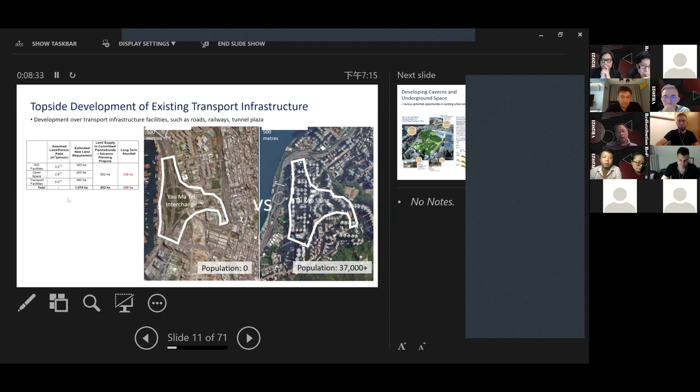Another opportunity we haven't explored is underground space. There's a lot of opportunity in Victoria Park and Kowloon Park, and also Quarry Bay, Causeway Bay, etc.

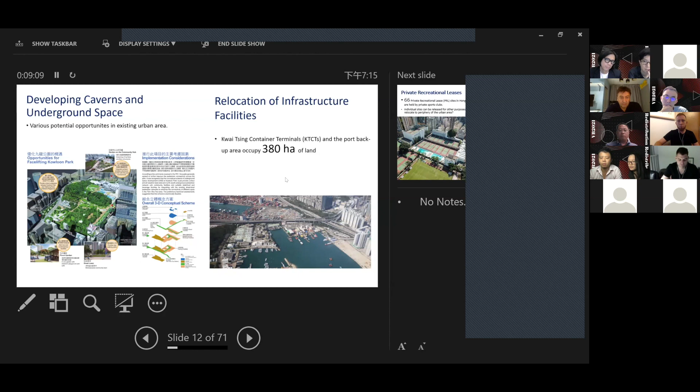And also those infrastructure occupying a lot of land, like the Kwai Chung terminal, container terminal. Because of history, they are there, but they are occupying a precious piece of land. Should they be relocated to somewhere else? That is also something we can discuss and see whether there's a better way of dealing with that.

And there's also GIC facilities, recreation facilities - we have a lot of those private recreation clubs in every part of Hong Kong. But in fact, should all these facilities be better located in better locations? For example, in the periphery of the city, maybe the edge of the country park or the greenbelt area, and just vacate the land for other more meaningful use. So this is something we could all consider.

And also GIC facilities now is a very old-fashioned way of planning. Government allocates lands to different functions, for example LCSD use, police use, fire service use, etc. But could that be better coordinated into multi-purpose GIC facilities? This could release a big number of very valuable sites in town.

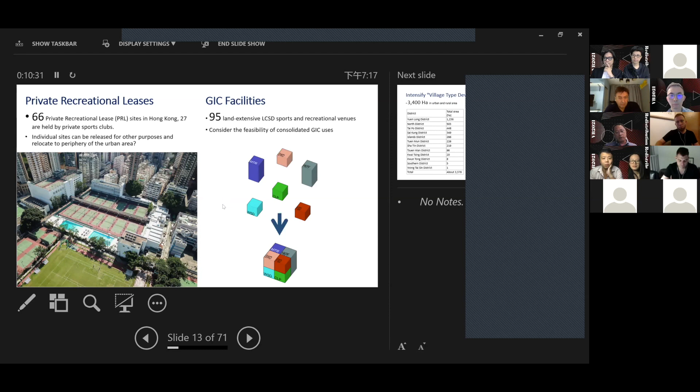The last one, but this is also a very huge figure - you may notice a lot of those village houses. In fact, it's not just in the rural area, it's right in the middle of town. You can see some actually located in Hung Hom, Wong Tai Sin, and the photos shown here are of Tai Po market, Tai Po station - it's right next to the MTR station. There's a huge stretch of village houses.

So currently the density is a 3-story building. If we can intensify that into 6 stories, for example, we can almost release over 1,000 hectares for other purpose. So all these are facts about whether we are really using our land resource in a clever, creative way.

So I'll just stop here and let the exhibitor go through the exhibit with us.

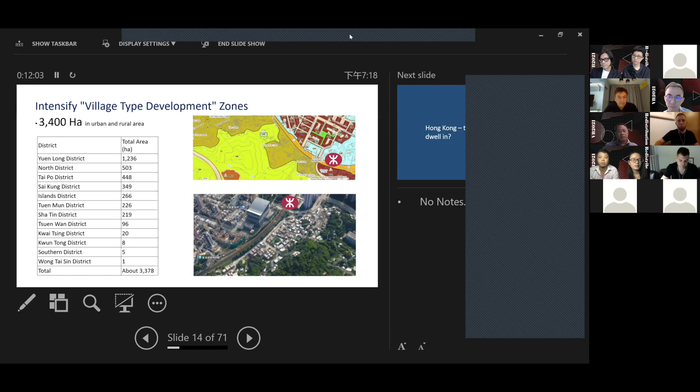Peter, hi, you're muted.

Yes, hi Peter, can you tell us more about your group's exhibit and its response to the main theme of redistribution? Yes.

Can you see the Hong Kong Squared spatial visions? Yes, we can. Okay, alright.

First of all, myself, Gerhard, and Daneil, we all trained as architects, and Gerhard, for instance, did his postgraduate PhD in urbanism. I am also an architect and urbanist. We teach in the School of Design in PolyU, and as part of our research, but also part of our teaching program, we teach graduate students, master's students in design, or specifically in urban environmental design.

Myself and Gerhard have been running a program for a number of years, looking at a sort of speculative vision of Hong Kong - not just Hong Kong, but also future urbanism or urban issues within the Greater Bay Area. At the moment we have stage 2 of this project going on, connected with TU Delft in the Netherlands, looking at the wider issues of future development in the Greater Bay Area. So refer you to this website if you're interested as well.

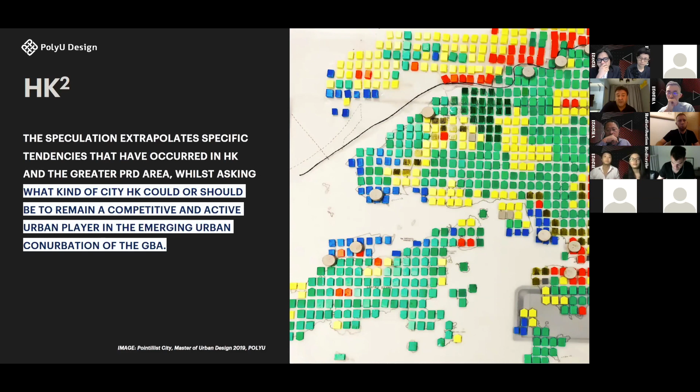These proposed scenarios focus on 3 key things. There are other aspects to this, but 3 general possibilities and 5 different morphological approaches. So the first one here is a monocentric territory. We know that Hong Kong has, for instance, one CBD, more or less 1.5, let's say, because Kowloon Bay is developing into what they call CBD2.

But we also know that in many cases, given the size of Shenzhen across the border now, the center of gravity of a lot of those things, depending on the sector or the industry, may be pulled closer towards the border or towards new infrastructures such as the Macau Bridge Airport cluster as well.

But there are other opportunities within this that mean we can actually investigate what those things are. We can speculate on future issues, much as you can see the government is doing, whether it's misguided or not, with proposed new islands just off Lantau.

Part B is polycentric node. In other words, that Hong Kong or its subcenters exist as a series of different nodes within the Greater Bay Area, allowing for specific expertise or specialization to happen within the wider urban agglomeration. The Greater Bay Area would in fact be a kind of urban agglomeration of well over 60 million people, with some estimates up to about 90 or 100 million.

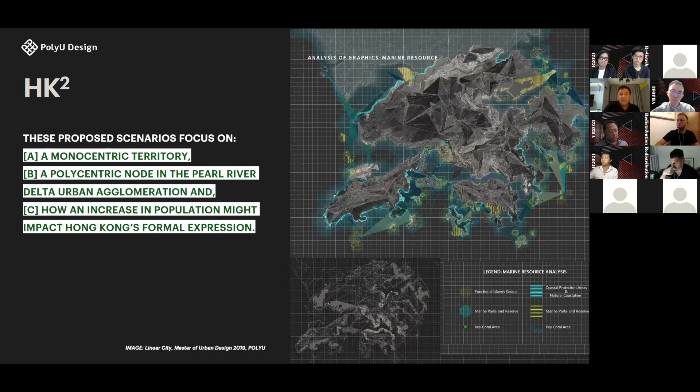The production of such approaches, we think, is highly relevant to spatial planning, but in some ways our particular point of view is that certain models of spatial planning, which tend to focus on the centralized city and its peripheries and edges, need to be questioned again: how and in what ways we begin to plan for new forms of city, for instance very, very large urban conditions, cross-border issues, and so on.

In the same way that perhaps Europe, once it looked at European Union integration, cities started to have to plan for cross-border things involving urban development that spans between two countries. This involves for us the opportunity to develop scenarios, to play out these opportunities, and then to look at these things on a series of very different scales.

We also asked our students, as part of their research, to project certain kinds of fantasies in the same way that MVRDV did, to imagine very speculative propositions or gameboarding processes, in other words, so that they can play out different scenarios without feeling constrained by existing urban methodologies.

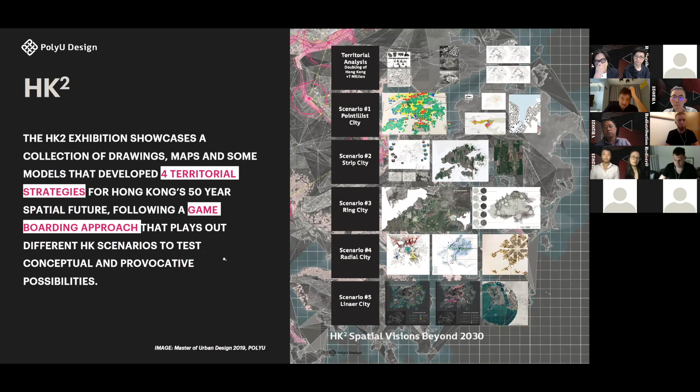So each of these then, based on the research, developed these 5 different scenarios. If you're interested, we're happy to provide more information—this is just a teaser. One of these that we selected for exhibition was this one called the Pointillist City, and we just chose a little part of this.

A tiny bit about this scenario: we eventually chose it based on increasing education and expertise in Hong Kong, with the development of things like UST, higher level research, the service economy and so forth, to activate some kind of specialization that can provide a competitive advantage for Hong Kong in relation to various cities across the border in mainland China that are more based on production.

So this would mean Hong Kong's vision would be a much more intensively research and university-oriented, industry-led research city approach. And then these little colored blocks would allow a certain kind of development to happen in this way.

Without explaining more, this approach simply chose a part of this as the base for our combined model exhibition, like a ground for some of the ideas that the other two groups developed.

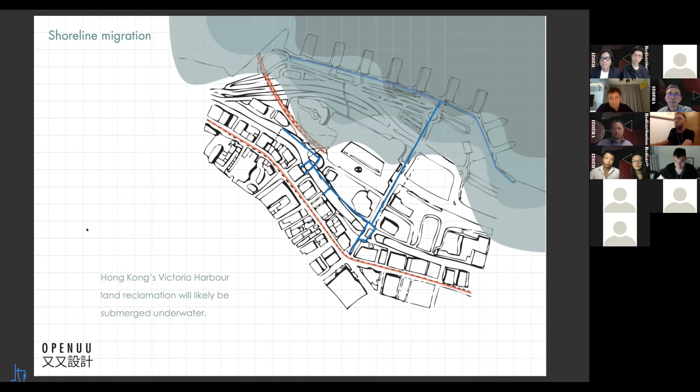...because Central actually has a lot of built-up areas over the years, and as the years move on, as you saw in the previous slide, you'll see more and more of that area covered. And as Joel already touched upon, the area that's been built up in Hong Kong is very small. The rest are all reserves or conservation areas, so not really touched. But based on what we have available, I think there are many opportunities to really increase the limited supply of land that we have in Hong Kong.

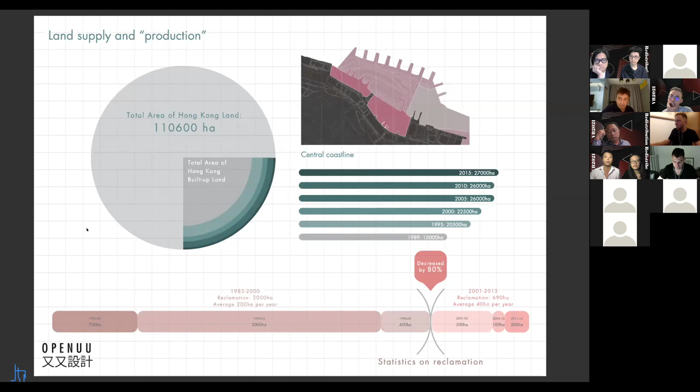As Hong Kong takes over more and more of its harbor, we are slowing down on reclamation, and we are seeing what reclamation does to the surrounding areas, especially the ecology of the harbor. Obviously it's not friendly, but it does give Hong Kong more land.

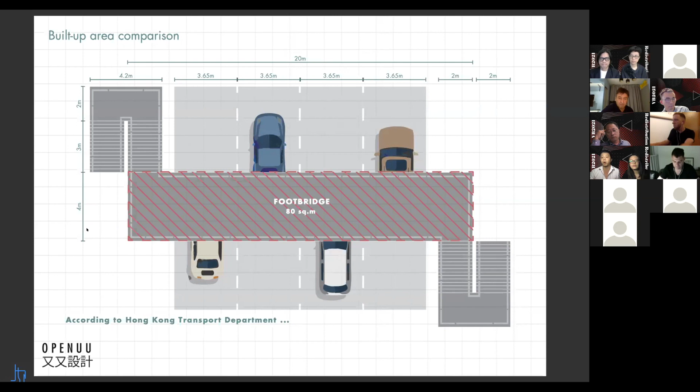So we've gone to explore, as I mentioned, we're looking at Central, and we're studying the bridge system. As a comparison, a typical bridge in Hong Kong is about 80 square meters in area - it takes up not even 4 parking spots compared to a parking lot. Hong Kong has a lot of these elevated walkway systems that we've looked at, and because we are in Central, we've chosen the Central elevated bridge walkway system to look into, though this can be applied to all the different districts where there are elevated walkways.

This is slightly inspired from Venice, seeing the Rialto Bridge - it's a bridge that's actually occupied, not just for connecting two points, but it has a program within the bridge itself. So to go a little more into what we plan for the programs...

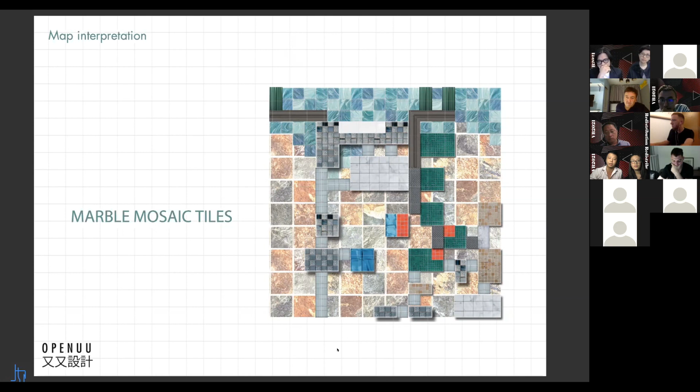To break it down, we explored in different years what buildings and bridges were built. Hong Kong really developed throughout these years, with the bulk of development in the 90s, then slowing down again in the 2000s because of the amount of land already built up.

Since this is a study of Hong Kong, we explored this further—the representation uses the colors of our money in Hong Kong, with 10s, 20s, 50s, 100s, and 1,000 represented. This plays along with Hong Kong being an expensive city, so we wanted to tie the expensive living to the color of our bills.

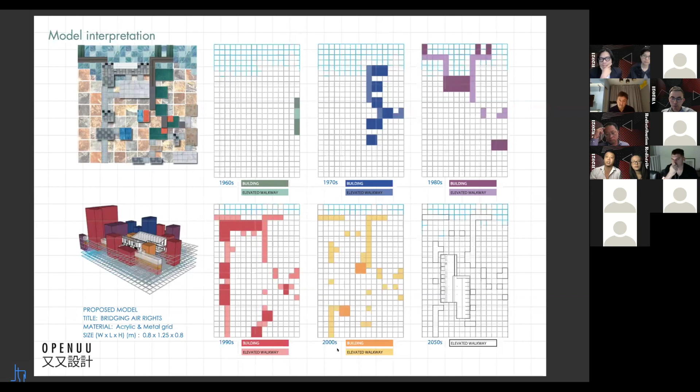There's a lot of inspiration from the Rialto Bridge, but also from Montreal, Canada. If anyone's been there, it's a cold city half the year, so there are bridging systems and underground walkways that are all programmed to fill up the city. It's not just a connection from point A to point B to stay out of the cold—there are other programs you could interact with as you walk through. We took that idea and wanted to implement it in some existing bridges in Hong Kong, or even new bridges built in the future.

Especially in Central, walking the elevated walkway connecting IFC towards the mid-levels escalators, certain parts are really wide. On weekends, you'll see a lot of domestic helpers occupying the majority of the bridge, yet you can still walk on it—people occupying it doesn't actually block all the traffic. So we wanted to adapt what Central already has to offer with some of these wider bridges.

Why not put in programs that could alleviate some of the limited space in Hong Kong—for example, playgrounds. When we were younger, there were playgrounds in a lot of city blocks. But a playground isn't a revenue-generating piece of land, so those get taken over for small developments or combined with other land for larger development. Kids nowadays have to travel just to experience the joy of being a kid.

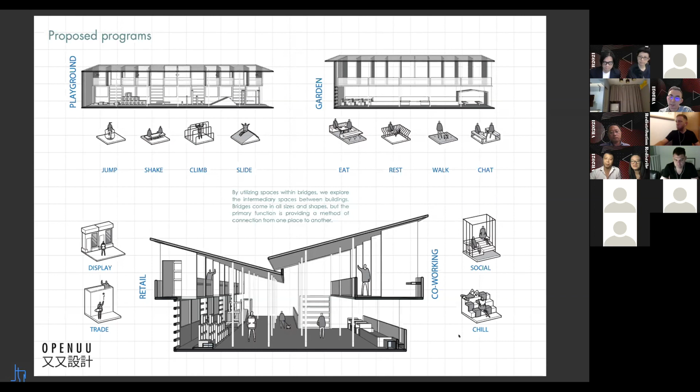Right, thank you, Kevin and Caroline. Very interesting ideas. Somehow, I think together with Peter's proposal, yours and Peter's already offering hypothetical answers, solutions to what Joe has pointed out about the redistribution of land.

And according to your exhibit's concepts, the next layer that we are going to see from VIA Architects, Frank Leung and Irene - I think the next level would be a smaller scale, right? So the scale would be going smaller on the topmost level of the exhibits.

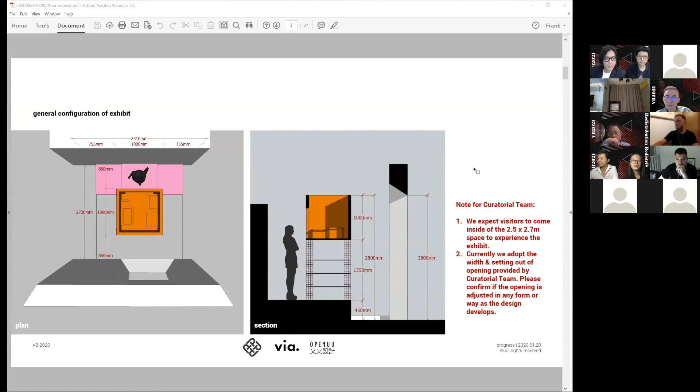Yes. Hi, are you seeing the screen? Yes. All right, so yeah, I mean, we started - it was a really great pleasure working with the PolyU team as well as Kevin and Caroline. And these are some of the shots. All right, you seeing it? You see the full screen now?

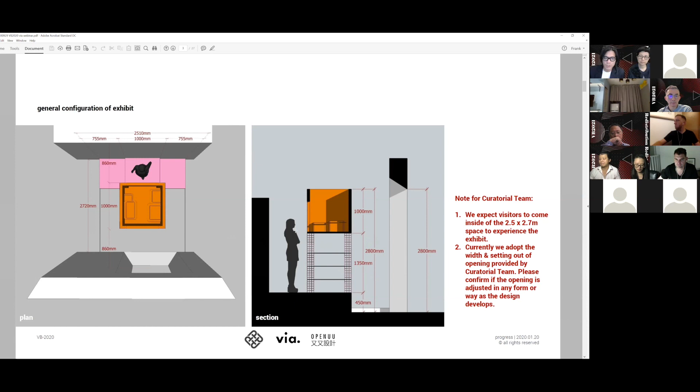Okay, yes. Okay, so here's the intention of the original exhibit. If it were to happen in Venice, it's a tower containing 3 layers, and I think PolyU's team had an urban scale, and Kevin's team chose to explore kind of a vicinity. We further zoom into a particular project, a particular plot, where visitors can actually climb a couple of steps to get an eye-level view of a project that we're actually working on in Hong Kong.

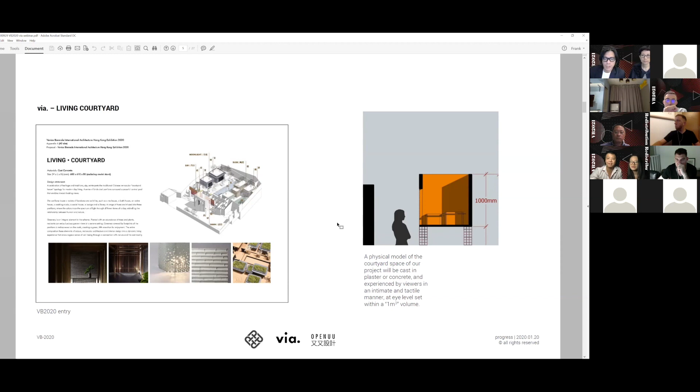So these are some shots that we submitted to the Biennale team. And the project that we're sharing is what we call Living Courtyard. We fit to the title here about redistribution. We work a lot with private residential development, and because of the prices and the pressure from the buyers, we end up dealing with units that are quite small, so the exploration here is to say, what can we do to the communal space that are shared by residents?

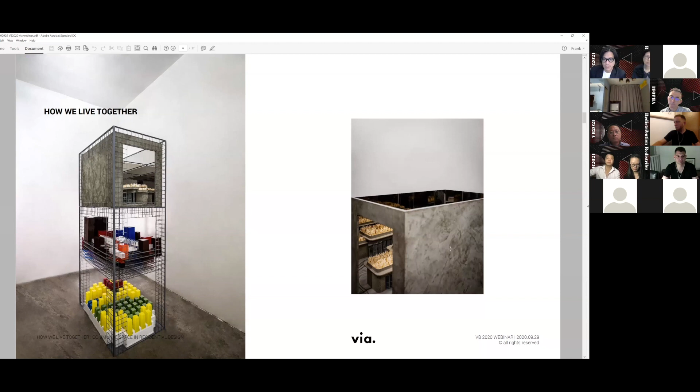And I know a lot of people will call them clubhouses, but in this particular case, you can see on the top part, this is our piece of the exhibit and a shot of it from the top. In our case, it is a courtyard space. The project is in Yuen Long, in a new territories area where there is already heritage of living in a kind of co-living way. So we really wanted to take the chance to create a communal space for residents in this project that mimics the kind of traditional way of living.

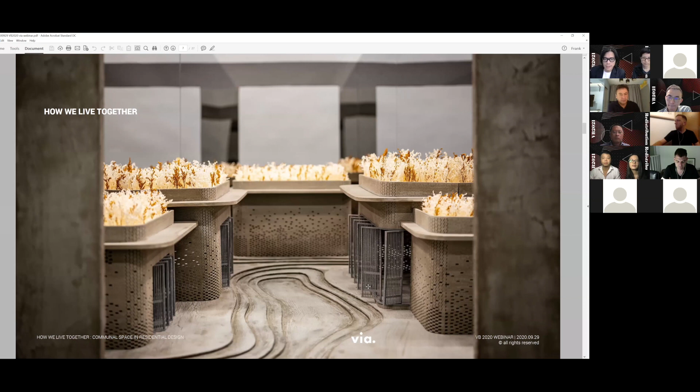So it's a number of functions surrounding a courtyard, and as you can see from the model, we'll explore a little bit more about the material interpretation. Here is a shot of the project that we're working on. Very happy to work, in fact, with AGC Architects, who are the overall architects of the project. We really handle the clubhouse portion.

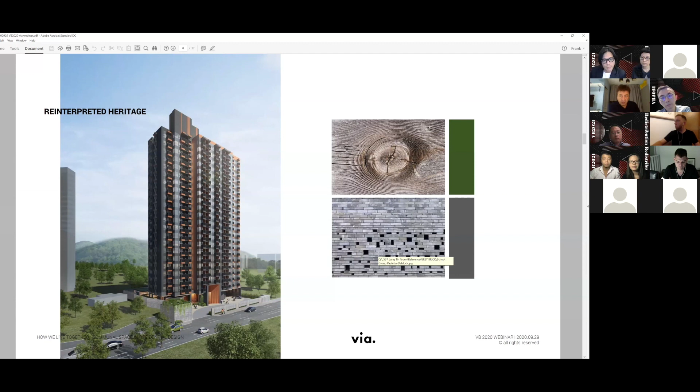Earlier on, we have already, as a team, decided to work with heritage language and materials. And when we started to look at the clubhouse, we really wanted to look back on this kind of communal living, where you have a shared space and a number of activities revolving around it - the archetypal example being the traditional courtyard house, where you have wings of different activities, a point of entry, and then you all share a common space where everybody can have kind of a breathing space as well as social activities.

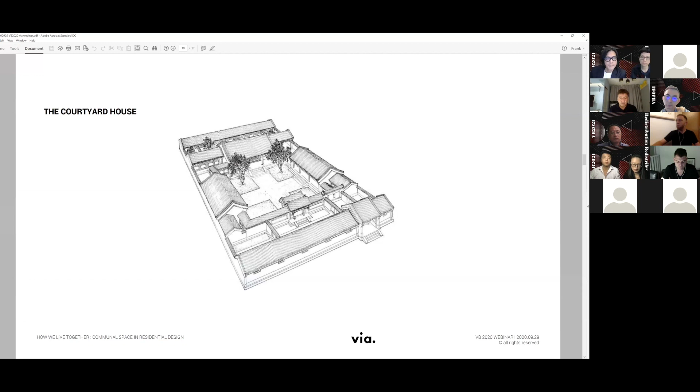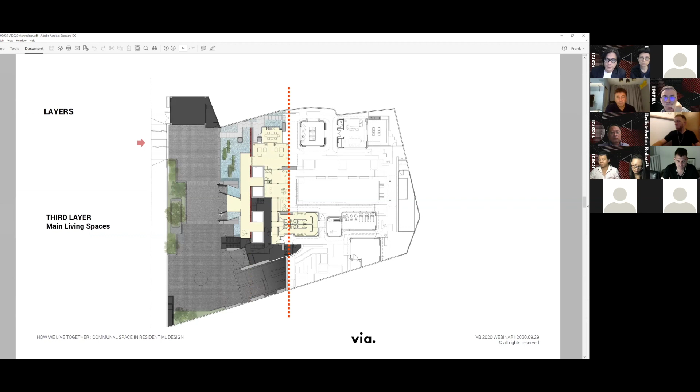We took the plan, and the project is perceived by us as a number of layers. The first layer of arrival is designed with a landscape court to arrive, traditionally called the Yingbik, the shadow wall, which is really the inner facade of the entire project. It stops everybody and redirects people to the next layer, the main living spaces of this clubhouse. But then there are other functions strung around different areas of the club surrounding a central pool.

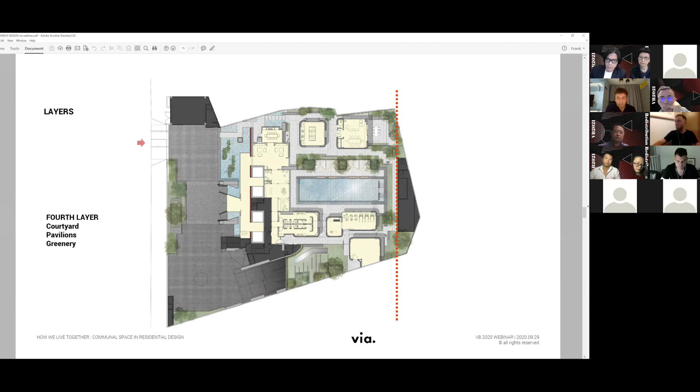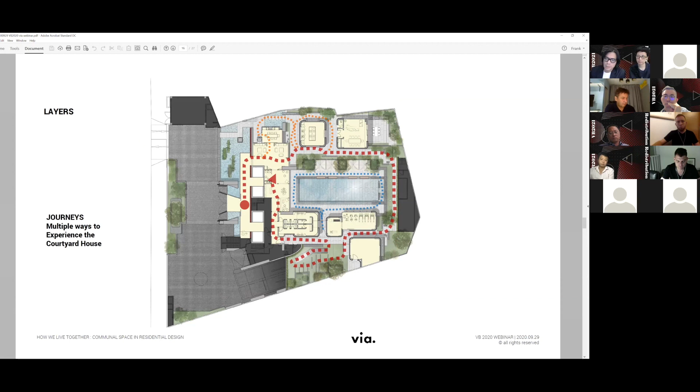This is what makes this courtyard space intimate and also a place for sharing. On the upper part, there are dining pavilions, a gym, kids facilities, landscape areas and so on that surround the entire scheme. By not having a singular interior volume, we're able to create an indoor-outdoor relationship, lots more choices in terms of experiencing the space, and a lot more choices to combine and use the spaces separately, for individuality, different age groups, and so on.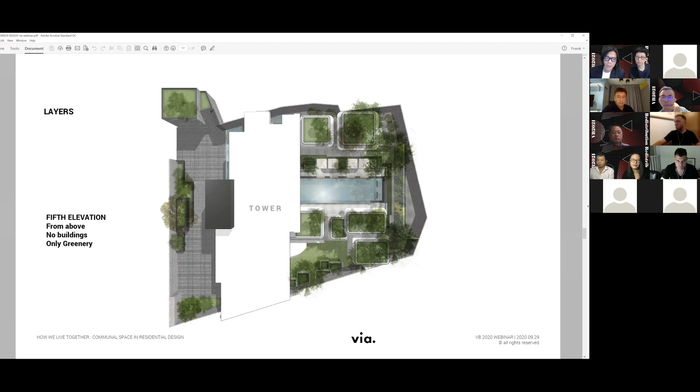The other element we have to tackle is that the entire landscape is really the base of the entire residential tower. So each of these pavilions is actually designed to be giant tree pits or flower pots. When you're looking from the tower into the courtyard, you're really seeing landscape, not buildings. That's very important to create a green, sustainable communal space for the residents.

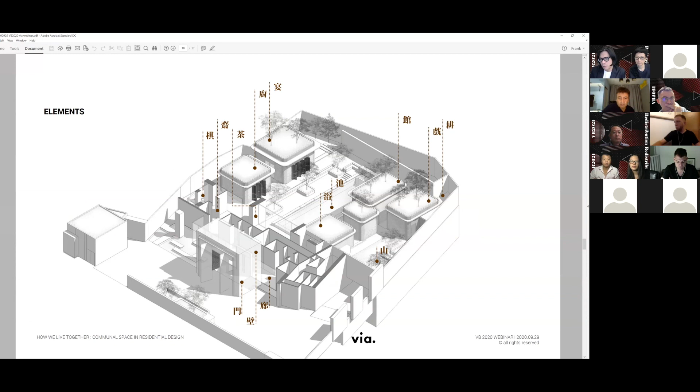Here is a diagram of the actual project and how the different elements are interpreted. Taking a nod to the heritage approach, we've given every function a Chinese word that signifies a particular function in that space. But that's really spatial arrangement, and we felt in every project we create, we really wanted it rooted to the location for the function as well as to find its soul.

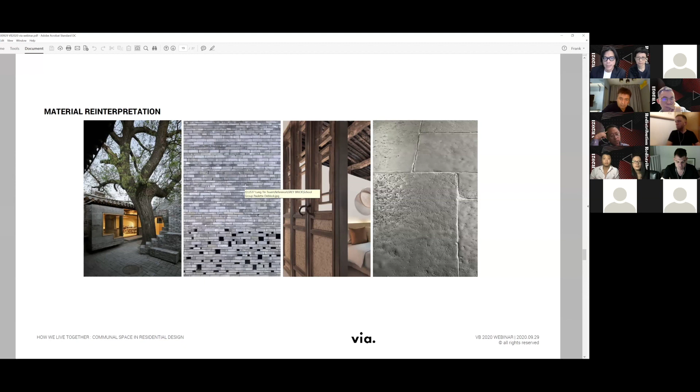And in this case, it's really the material. We explored a number of ways to actually execute these buildings, and we came up with bricks and a combination of stone and timber. But the biggest thing is brick.

The other thing we wanted to instill into the design is this idea of light. In a traditional farmer's life, light is really important throughout the day, with different qualities of light guiding you through activities. So the Chinese saying goes, you actually follow the sun. With that, we created an interior design palette that follows the colors created by different times of the day.

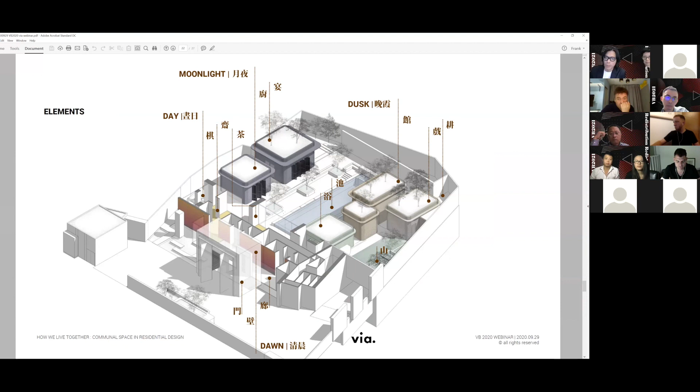I won't go into the individual spaces and renderings, because those are first-hand sales restricted material. But these are the guiding principles that guide us through different areas, and you can see an application of the different hues throughout the different functions of this scheme. So it's not just the form, but in the spirit, we're using a very traditional way of looking at the world to design this space.

Of course, brick is at the center of creating and drawing the heritage roots to this particular project. My team and the construction team spent a lot of effort studying ways of using or reusing qingzhuan, that's the Chinese brick, not only how to do it when it's flat or turning the corner, but we really wanted to do something with a certain level of porosity that actually modernizes the brick.

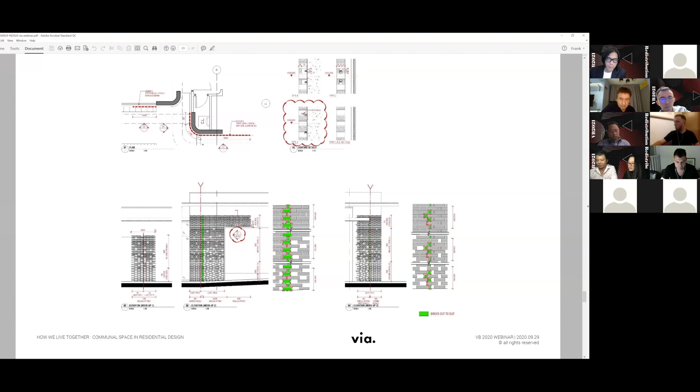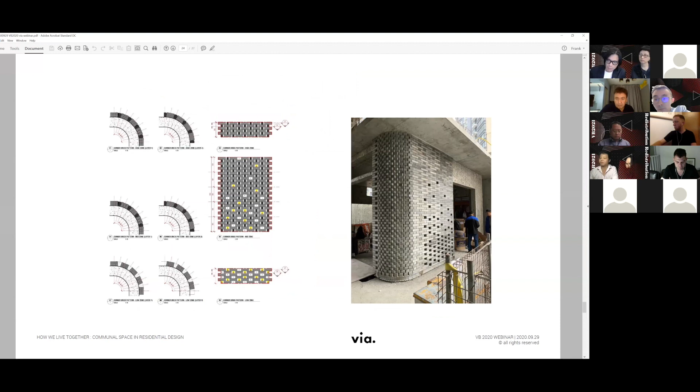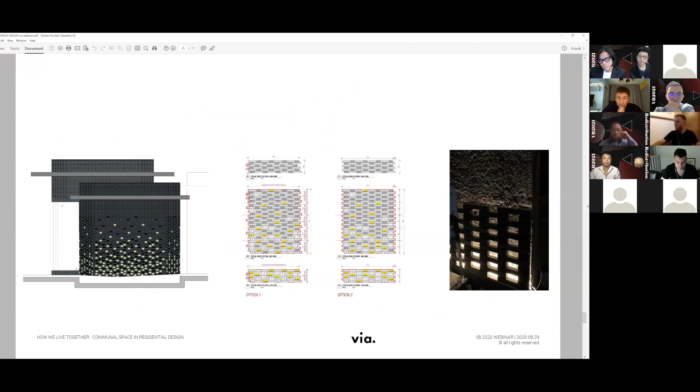So these are some of the studies and mock-ups we've done numerous times, studying how to turn a corner and make brick pieces hollowed out. This slide shows you the lighting effect we could have, the translucency, the illusion of depth, much like a Chinese screen. Working with a wonderful Japanese lighting designer on this as well, to achieve an effect that's like a glowing lantern in the evening.

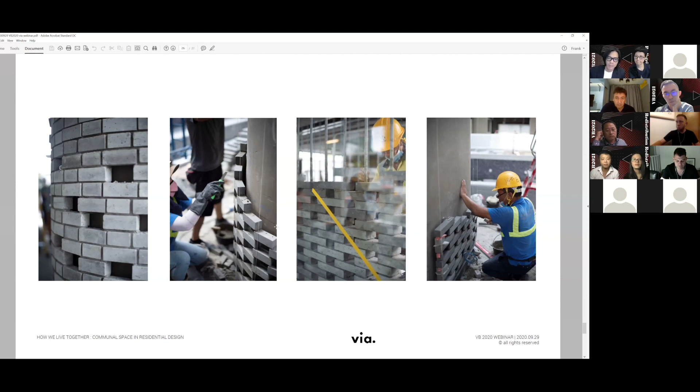This is really our last slide. I think in architecture, nothing can really happen without pairs and pairs of hands. Every time I go on site I took these pictures of the wonderful craftspeople who put these together, it's a very roll-up-your-sleeves kind of thing. As part of the exhibit, we went to a much more micro scale, from Peter and Gerhard's and Daniel's piece to Kevin's piece, and now we're zooming into a very, very intimate project. So that's really our part for tonight.

Right, thank you, Frank and Irene. This is a really nice project. Congratulations. Thank you.

I can see from a bigger scale with Peter's model to Kevin's scale in your project, you have different layers of spaces to redistribute a flat piece of land and make the spaces more efficient. But since this is a private project, this is almost the only chance we can see your project, right? Unless we buy our way in.

That actually leads to our subtopic for the second half, which Chou has more to share, whether Hong Kong is the most expensive city to dwell in. So Chou, are we going to the second part directly? Yeah, we're going to the second part. Okay, good.

Just one moment. So I have also prepared some slides about the second topic, the topic of the most expensive city to dwell in. Okay, let's see.

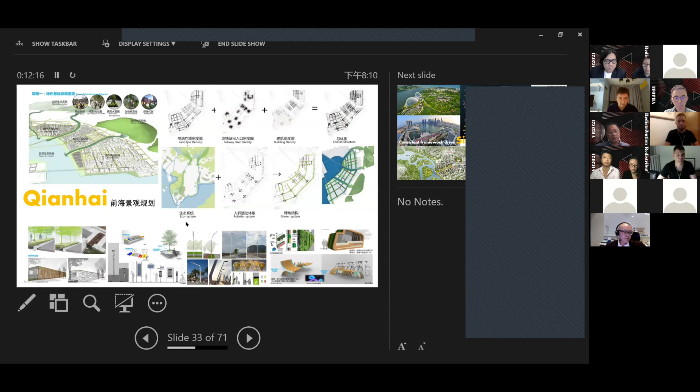Sydney also has the vision, and also Copenhagen. I won't go into detail, but our brotherhood city, Shenzhen, is also doing very well—they have a very good system of urban design and picking the right design to implement. Singapore, I won't repeat, is also doing much better than Hong Kong.

Going back to Hong Kong, the issue is redistribution of land, and the recent COVID situation has prompted me to really rethink whether the current way of re-procuring our city is really the right way of doing it.